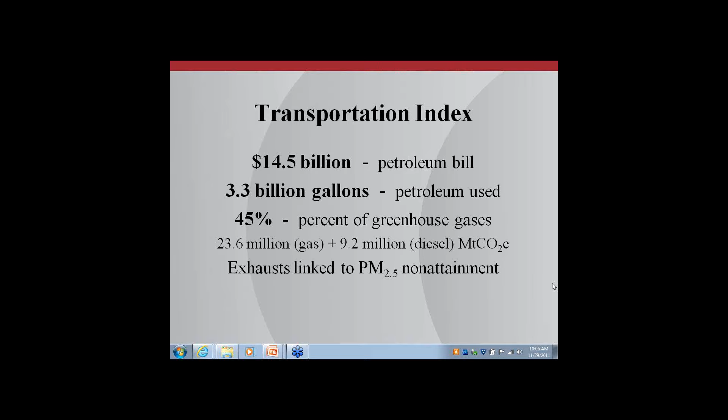Transportation is an important topic, and you can see some of the issues here. $14.5 billion spent on petroleum in Washington State. That's 3.3 billion gallons. Transportation makes up 45% of our greenhouse gases in this state. It's the single largest source of greenhouse gases. It's also linked to particulate matter pollution, and there are several areas in the state that are non-attainment areas, and that can be addressed very nicely with a transfer to natural gas or biomethane.

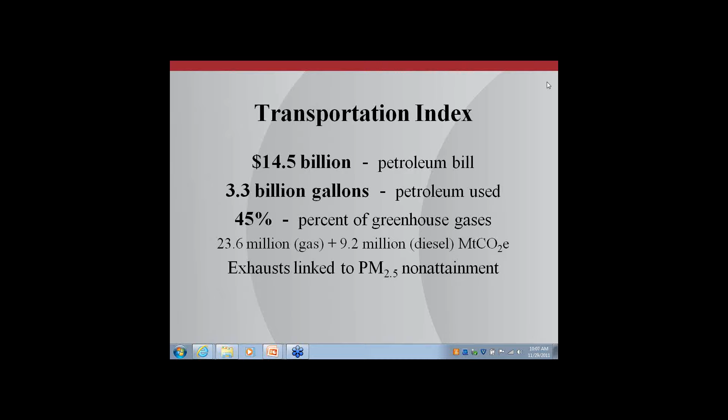We think CNG is the pathway forward for biomethane adoption. Natural gas as a fuel produces much less smog and less greenhouse gases than its petroleum cousins. Natural gas is for the most part made in the United States, so a domestic fuel, and currently is available on a diesel gallon equivalent for about $1.50 to $2, so some significant savings over diesel for heavy-duty trucks. It also qualifies for a fuel credit from the federal government, and more vehicles are coming to market. The manufacturers are developing conversion kits as well as dedicated vehicles for natural gas.

And we think that's an important in for biomethane, which in comparison to natural gas has the same reductions in smog, but even more reductions in greenhouse gases. And because biomethane can be made from local sources, we even get to keep more of the economic value here in Washington State.

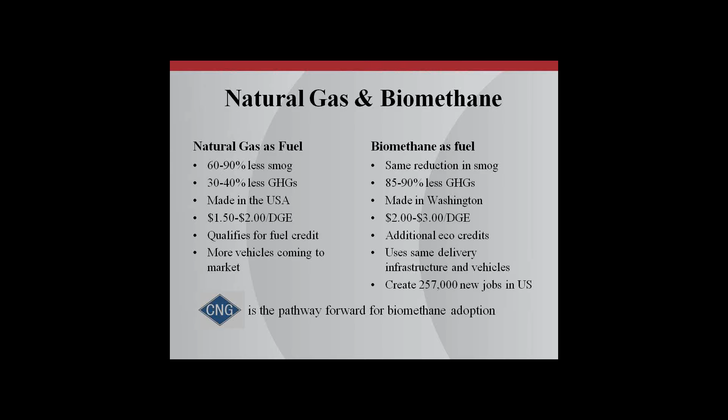It can be produced, we believe, for about $2 to $3 per gallon equivalent compared to diesel, so still a better deal than diesel, and may be eligible for additional environmental credits or renewable identification numbers through the federal RFS, the Renewable Fuel Standard. It uses the same delivery infrastructure and any of the same vehicles that natural gas uses, and overall in the United States could produce over 250,000 new jobs.

There are several potential sources of biogas for biomethane. Landfills is a sizable one, but you see already some of these larger landfills, Cedar Hills and Roosevelt, are already moving toward doing power production. But we have a great opportunity that we're going to learn about a little bit more this morning at the LRI landfill in Pierce County, where power and CNG will be part of that mix.

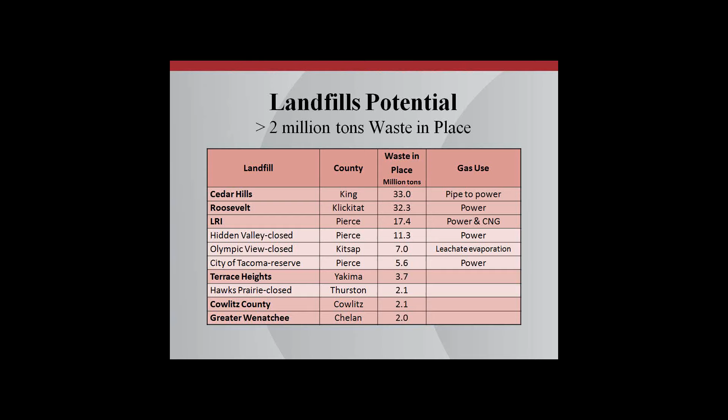Wastewater treatment plants are another important potential. And we have, again, several of the larger ones that have done projects of doing power production, or in the case of the South Treatment Plant in King County, they're putting the biomethane into the pipeline where Puget Sound Energy is using it to make power. But there are a couple of good opportunities in Tacoma at the Central Wastewater Treatment Plant, at Chambers Creek in Pierce County, and at Brightwater in Snohomish and King County, where there could be some additional emphasis on CNG.

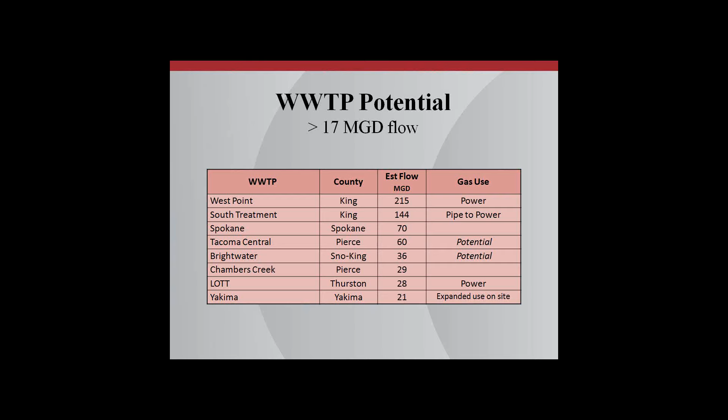It's expanding with more and more technologies and more market development. More of this organic waste is being captured in our yard waste carts, or what are becoming organics waste carts, where instead of, or in addition to composting, that material could be digested first. There are new technologies, some of them high solids digestion technologies, that could capture the energy value of those materials before it goes to compost or fertilizer manufacture.

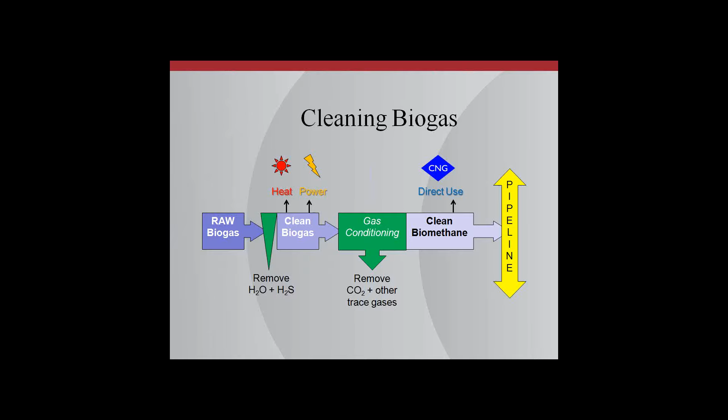Here's some of the basic information we've learned through our study, literature search of various studies on the economics of producing biomethane. You can see some of the results there. Smaller projects on the left here where the cost of producing biomethane is still pretty high relative to things like electricity, and certainly many of them higher than the cost of natural gas wholesale right now. But as you get to larger projects, you can see the cost of producing clean biomethane drops down to where for larger landfills it can compete directly with natural gas as a source.

The cost of compressing biomethane adds something to the project, but what we've learned from talking with developers is that compressed biomethane or bio-CNG can be produced for about half of what diesel is today. So maybe double natural gas, but half of diesel.

This leads us to the conclusion, something that's confirmed in these different studies, of reported thresholds for various size projects. So a dairy manure project alone would need about 8,000 cows, or the equivalent of gas of 8,000 cows if they're doing some co-digestion. Wastewater treatment plants, National Grid in the Northeast found through their economic analysis that about 17 million gallons a day treated and then digested the solids puts them in that threshold of seriously considering biomethane. And landfills, they need about 2+ million tons of waste in place, and then an increasing amount over time.

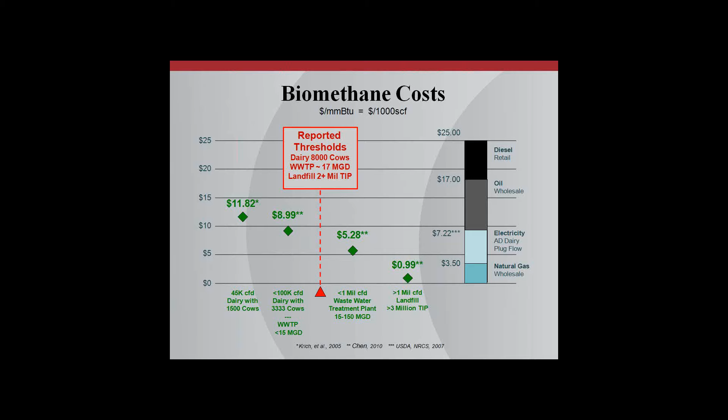In terms of power versus biomethane for fuel, here are some of the market trade-offs we've learned of. There's a lot of experience regarding power generation, and at the same time, some market variability. Some areas where digesters can get really decent prices for the electricity they're producing, others where the price availability is much lower and doesn't make for profitable projects. These projects tend to be tied to a local utility, so you need to get some buy-in from that utility. You don't have a lot of choices of where to go with electricity.

There's low efficiencies. The engines themselves are about 30 to 35% efficiency on the high end, unless you find profitable uses for the heat that comes off of the engine. There is some preference in some of the USDA grants, the REAP grants in particular, that give a preference to power generation. And in Washington State, I-937 provides a credit and a bonus for projects producing power from biogas.

In terms of biomethane, you still need to use some of it to heat the digesters, but a direct use is great. If you can make direct use of the biogas, some larger dairies in the country are using it directly to power their milk trucks. If you can get it into the pipeline, that gives you a lot of flexibility. And there's very high efficiency in terms of natural gas equipment, boilers, engines, and vehicles.

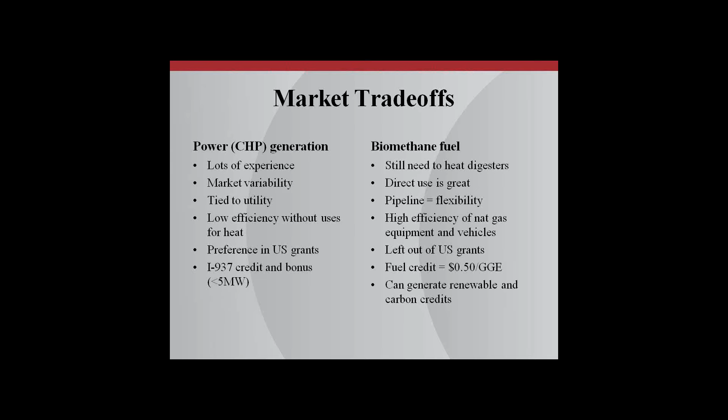Currently, they're left out of some of the U.S. grants, as I mentioned, but there is a fuel credit of 50 cents per gas gallon equivalent to natural gas and biomethane projects. And they can then produce renewable and carbon credits. So you get some of that environmental benefit. That's pretty important in terms of market development.

So overall, we see some terrific opportunities for the Clean Cities Coalition and other advocates to do some replacement of diesel and gasoline to replace some of those impacts with cleaner local biomethane.

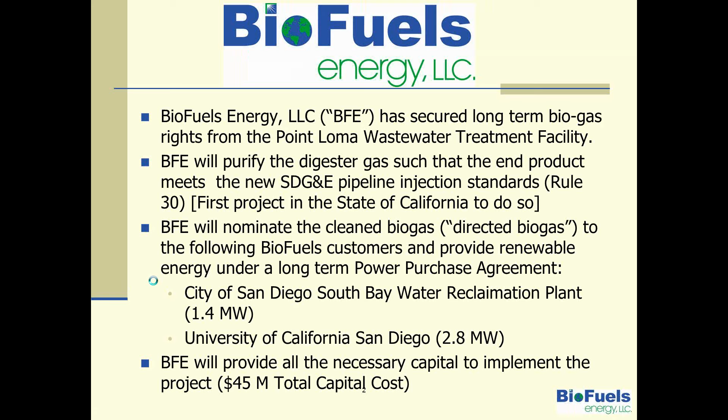The Point Loma wastewater facility is owned by the City of San Diego, and Biofuels is paying the city for approximately 1.1 million standard cubic feet of digester gas. That gas is approximately 62% methane, that would otherwise be flared. You can actually see in the upper right-hand corner the gas flares there. There's 3 gas flares. When we purify at the proposed BUDG site, we will actually bring those flares down.

The city is also presently generating about 4.5 megawatts with the other 2/3 of the gas that's being produced at this facility. But due to incremental cost of transmission upgrade and expansion, it wasn't financially feasible for them to use the balance of the gas. The city utilizes about half of the energy of the 4.5 megawatts that they generate at the site, and the other half is actually sold to SDG&E.

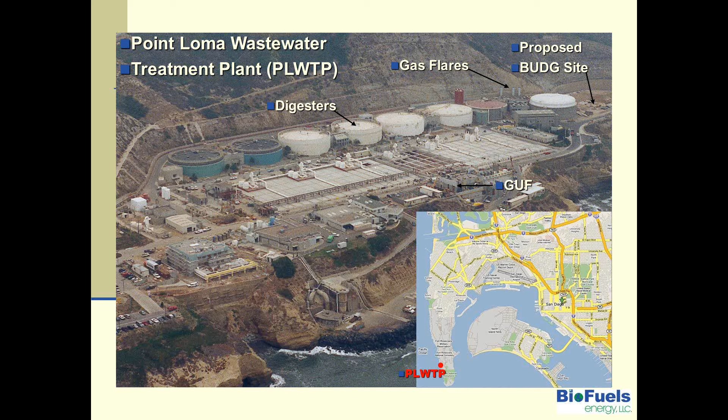Now, as you probably know, but I want to make sure it's understood by all, the biomethane molecules themselves that are being injected at Point Loma, as you can see in the map in the lower right-hand corner, it's at the very point of the peninsula, won't be supplied to the University of California, San Diego, which is 28 miles away, or the South Bay facility, which is 15 miles away. The gas molecules at Point Loma will actually be cooking eggs in the morning for the residents down in Point Loma. As I said before, that's a first in the state of California.

Turning now to Pierce County, Washington. Biofuels has executed a long-term 20-year contract with Waste Connections, who is the owner of the LRI landfill. The project will be developed in phases and will include the production of a CNG product that will meet the California standard for compressed natural gas as a CNG transportation fuel. I'll actually review that specification a little bit later.

Unlike the situation in San Diego, the renewable CNG will be delivered to customers within a 50-mile radius in tube trailers, much like propane is delivered to outlying facilities today.

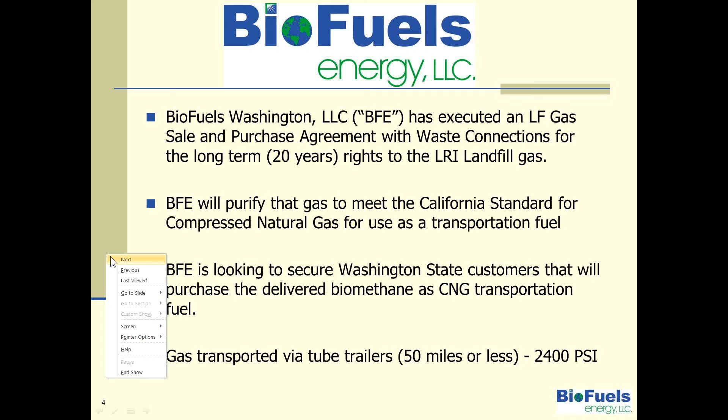The LRI project is located approximately 30 miles from Tacoma, 50 miles from Seattle, and about 5.5 miles due south of downtown Graham, Washington.

Our first option for the LRI biomethane is to sell it as a CNG transportation fuel in Washington if users in the state of Washington are interested in the product and will step up to purchase it. It's our intent to actually develop the LRI landfill project in 3 distinct phases, and thought it was worth going over the numbers in regards to that development.

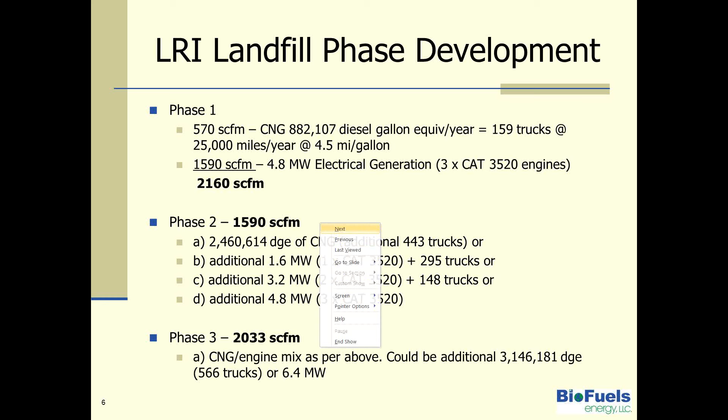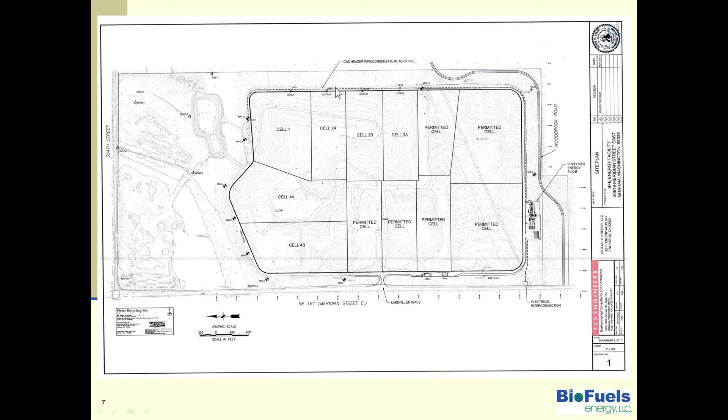This is a closer look at the site layout itself, just highlighting a few points. You'll note that there's the 3 Cat engines, 1.6 megawatt engines, and it will accommodate an additional 3 in the layout if we should go in that direction. Note the 4 CNG loading bays where tube trailers may be continuously loaded. There is available space to extend the number of bays in the future.

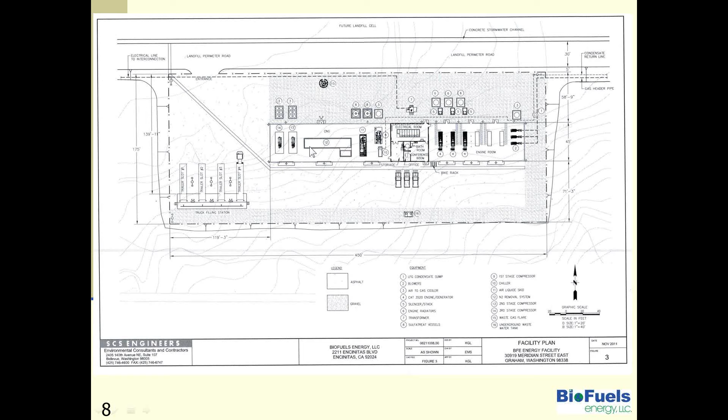The layout includes the Air Liquide skid, whose main purpose will be to extract the 35% plus of CO2 in the gas. And then that's followed by a nitrogen removal system. The air permit has been submitted for a new flare, and the existing flares at the landfill site will be brought down and displaced by that one flare. But the flares at the site will continue to stay in place in case we're down for any operation. Then the existing flares will be utilized for the gas.

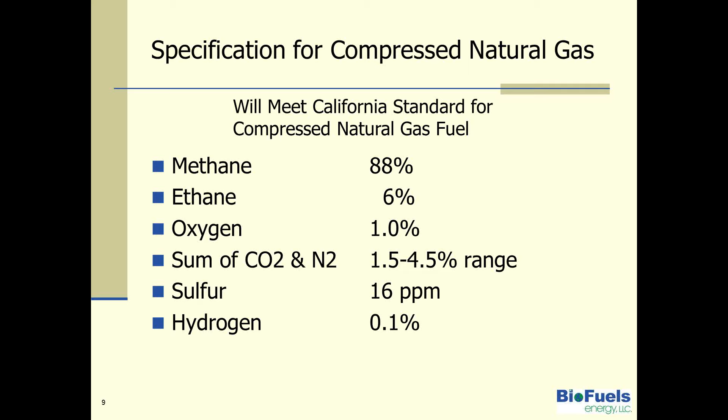I wanted to make sure that I made available the CNG gas spec, and I'd just like to highlight the methane content. 88% is significantly less than the 98% specification that's required for the injection of CNG into the pipeline in California, and to a lesser degree in Washington. I think it's 97 or 97.5 in Washington. Landfill gas presents a significantly greater challenge in terms of cleanup, however, than a wastewater treatment facility. So if a decision was ultimately made to transport the biomethane to California, the cleanup system required would be more rigorous than that necessary for CNG as a transportation fuel.

Just to share with you the highlights of the project development schedule. Both the air permit and the land use permit to Pierce County were submitted earlier this month, and we anticipate to execute a contract with Puget before the end of the year in December. And simultaneous to the permit activities, detailed engineering will progress during the first half of 2012. We anticipate that the permit process will be completed by the middle of the year. And this will result in CNG being available as a transportation fuel in the summer of 2013.

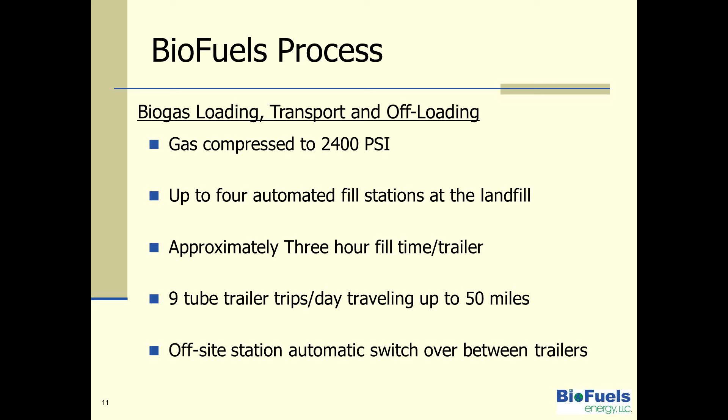The tube trailers themselves will be loaded at the landfill and compressed to 2,400 psi. Each trailer will take about 3 hours to fill in phase 1. And there will be approximately 9 CNG trips per day in and out of the landfill for the first phase. It should be noted that off-site fueling stations will also need to be installed at or near customer locations. If the phase 1 CNG portion of the project is successful, we are also considering the possibility of constructing a merchant Pierce County CNG station available to the public to further the concept of CNG as a transportation fuel.

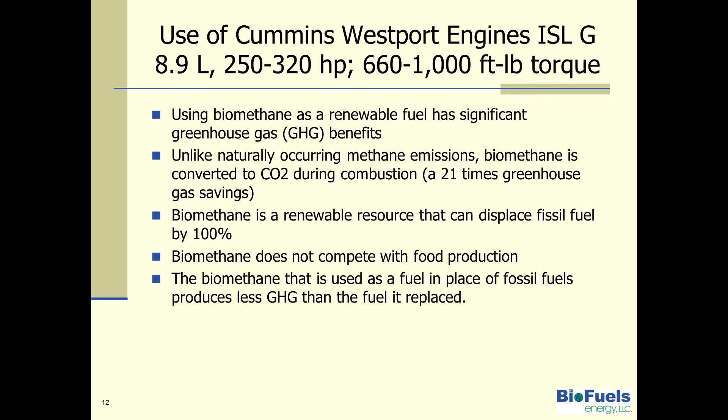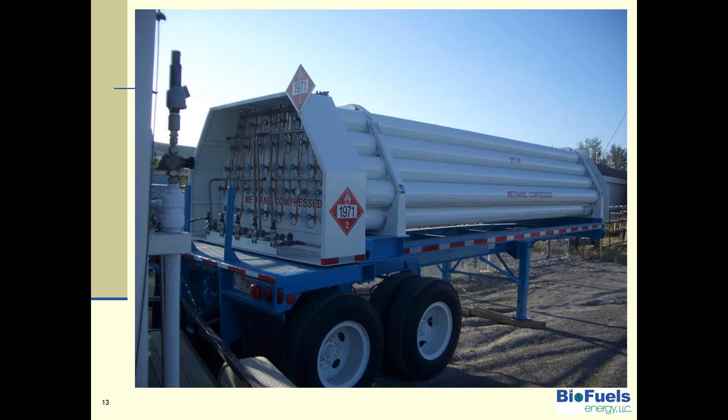The tube trailers themselves that we will utilize to transport the CNG will be fueled by CNG from the landfill. We anticipate purchasing 4 Cummins Westport ISL G 8.9 liter engines. In addition to all of the environmental reasons for the use of renewable CNG as a transportation fuel, in my mind, the most significant advantage is that the implementation of this concept, if adopted on a wider scale basis, including the broader use of natural gas, will reduce the country's reliance on gasoline imports and improve our balance of trade. If you haven't seen the tube trailers I've been referring to, I just thought a few pictures might be helpful to give you an idea what that might look like.

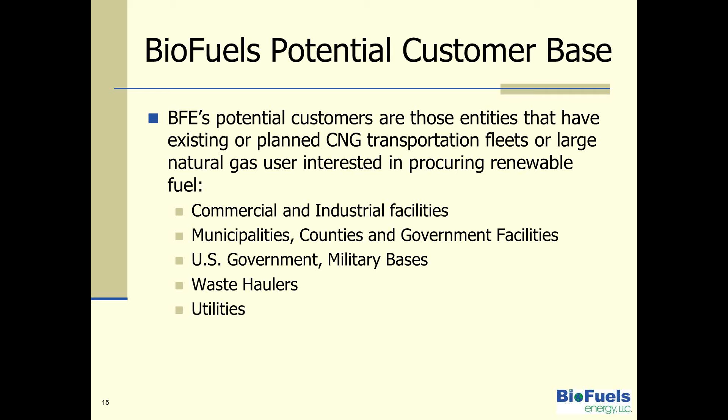The customer base for CNG that is produced will hopefully be utilized as a transportation fuel, but could also be made available to large natural gas users interested in procuring renewable fuel. Although with the present prices on natural gas, this seems unlikely. It is more likely that municipalities, counties, or government agencies are the more likely candidates. Corporate entities with large transportation fleets or waste haulers or utilities also seem to be potential candidates.

In closing, I'd like to highlight the potential yearly fuel savings for those considering the alternatives. The renewable CNG can be purchased in present-day dollars for approximately $2 a diesel gallon equivalent. That was at the lower end of the spectrum that was provided by Jim, as compared to, say, $4 a diesel gallon equivalent. The yearly fuel savings associated with the initial phase 1, 159 trucks, would be approximately $1.76 million a year in fuel savings, again, assuming 25,000 miles a year at 4.5 miles a gallon.

For a full CNG build-out, the fuel savings could be as much as $13.5 million a year. A long-term purchase will provide the added benefit of dependable, predictable, long-term fuel sales. With that, Jim, I'd like to turn it back over to the next speaker.

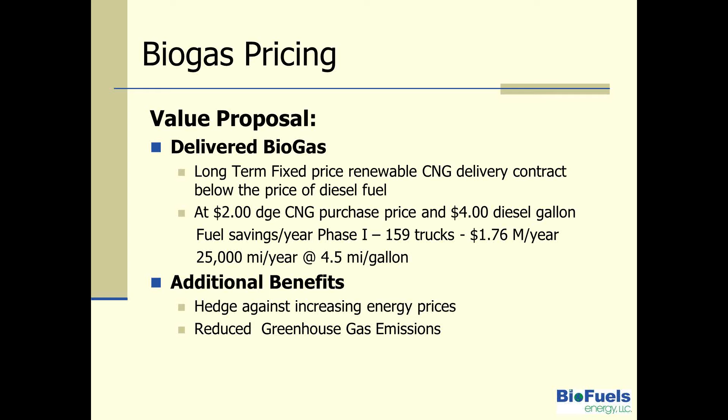Thank you very much, Frank. A couple of quick questions while we're transferring over the presentation to Scott. Someone wanted to know, are you able to use the heat from those CAT engines? Right now we have no plans to utilize that heat, unfortunately. So there'd be a significant heat resource there if industry was able to use it.

And in terms of the gas cleanup technology, you're using an Air Liquide system. Can you describe that just briefly? It has a PSA in the system, and again, I emphasize that the main focus of that Air Liquide system, there's many applications of that, including we're using the Air Liquide system down at the Point Loma facility. I would encourage you to go online and Google Air Liquide, is to remove the CO2 from the gas.

I might add, I'm going to take the opportunity to just inject. You can see on this last slide I included John Rogers' name with Waste Connections. He's the district manager for the LRI landfill. So there were certain subjects as it related to the landfill and the public relations associated with the landfill. I would direct any of our listeners to contact John in that regard if there should be any questions. Okay, now we're going to switch over to our third speaker and take additional questions at the end.

Our third speaker here is Scott DeWeese. Scott's a grant administrator for the Western Washington Clean Cities. He joined the coalition last year to help manage the multiple grant projects occurring at the coalition right now, as well as to lend expertise with the Western Washington University Biomethane project at the Vanderhaak Dairy in Whatcom County. Previous to joining the coalition, Scott was a business analyst in the commercial solar industry and cut his teeth on developing ownership structures for third-party financed solar projects.

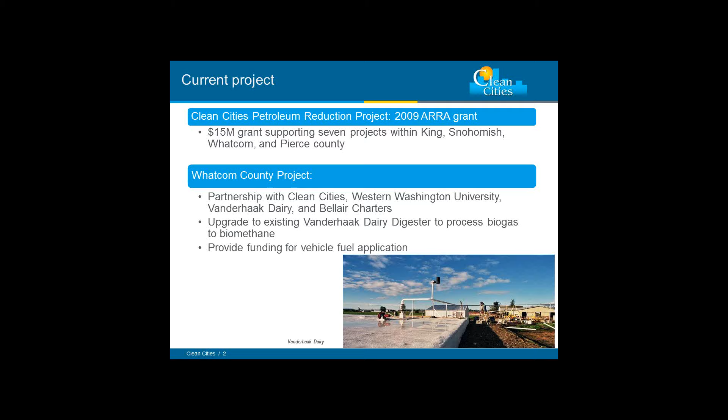The goals of our project were basically to demonstrate that dairy farm scale biogas projects are feasible and financially attractive. In addition to that, we also wanted to illustrate the energy resource available in Whatcom County.

We have a really unique situation in that Whatcom County has a very large agricultural and dairy industry and is also the host to the Vehicle Research Institute at Western Washington University. So you have a world-class group of engineers looking at vehicle technologies of all sorts, and you also have a very strong influence in the community and an appreciation for agriculture. So there's a real opportunity there that the Vehicle Research Institute identified, and we were fortunate enough to participate in.

And just to give you guys a sense of scale, there are 41,000 cows in farms 200 head or larger in Whatcom County. And based on a fairly conservative estimate of the amount of methane available in farms 200 cows or larger, we estimate that that would produce enough fuel to be equivalent to 3.9 million gasoline gallons per year. So there's a huge opportunity for this local community to produce its own fuel and pioneer some of the technology and business models necessary to realize this untapped energy resource.

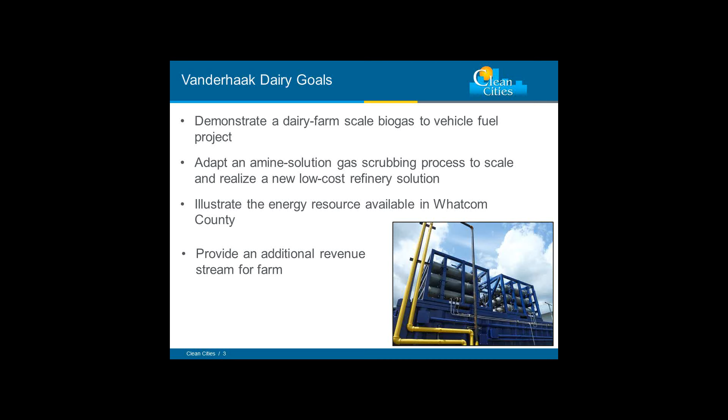And there's the stars of the show right there. You can see them up front. They're very photogenic heifers we've got at the Vanderhaak Dairy. And in the background, you can see this container here houses the compressing equipment for the fueling station. And these contact towers here are where the gas is cleaned and refined of its contaminants. And then on top of the container, you can see our storage vessels, and there's a two-line dispenser back there.

As you can see, the facility is mostly built right now. Our CNG station is operating. The vehicle for the Bellair Charters has been converted. I'll talk a bit more about that. And the biogas refinery, the cleaning process, has essentially been constructed and is undergoing testing and some small process revisions right now.

Like any project of its first, there were a lot of challenges and changes that occurred along this process. Starting with the vehicles, we had a tourism company that operates a fleet of coaches, MCI coaches, and those vehicles use a Cummins ISL engine. And so we believed that they were going to be fairly good candidates for being retrofitted with an ISLG engine to use the natural gas. There were challenges associated with retrofitting those vehicles that we didn't foresee, and unfortunately we were not able to convert the vehicles we had planned on converting to run on natural gas.

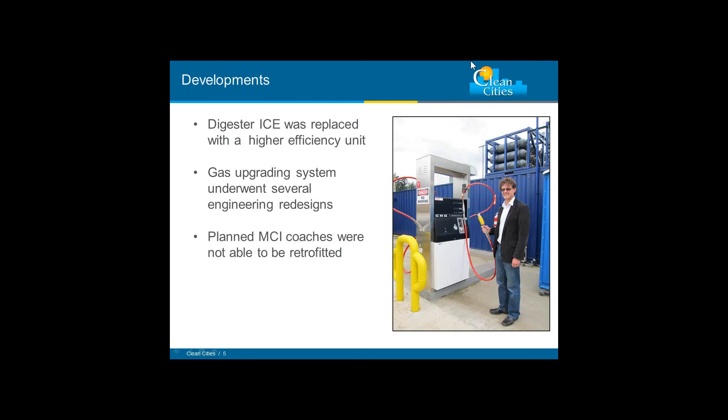In that previous slide, I showed the two contactor towers. The original design called for those two towers to be operating in parallel, but in order to meet the gas quality requirements we had set out to meet, the system had to be run in series instead. And it would have been a better design to have a single tower rather than two towers in series. But again, those are the things you learn.

Setting out in this project, we believed that we would be able to provide fuel at $2.50 per gasoline gallon equivalent delivered to the off-taker. And there were challenges associated with that, and one of which, and I'm jumping ahead here, but partner expectations is a real paramount concern for this project.

And what we discovered was we have a farm here that has an established contract with a power utility and had a very favorable price for electricity that they were receiving. Now, as Frank showed in his PowerPoint, you really don't need to divert a large portion of the gas you can produce at one of these facilities necessarily to meet the amount of fuel that you're trying to make. And that's the case with this dairy as well.

We were looking to use only a very small portion of the gas that was being produced by the facility as vehicle fuel, and the remainder would still be used to generate electricity. But it was difficult to quantify the amount of gas that we were going to need. And between the seasonal variation in the gas production and the farm upgrading their engine and therefore being able to use more gas, we were in a scenario where we needed to compensate the farm for at least the amount that they would earn in burning that biomethane as an electricity product.

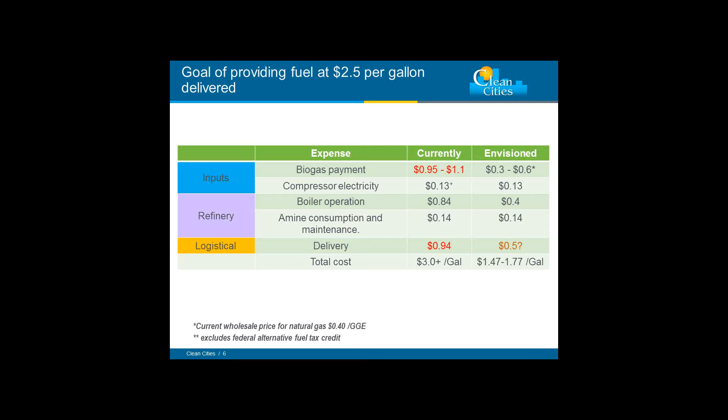And these prices do exclude the 50 cents per gallon or net 40 cents per gallon federal tax credit that the university will be able to take, although that is slated to end at the end of this year. So there's a bit of uncertainty associated with leaning on that tax credit for the economics of this project.

So, what we learned really is that really clear communication between the different partners is paramount for a project like this. If we had a bit more notice and foresight about the initiatives that the farm had in terms of their power generation, I think that might have altered our strategy a bit.

And I think that also really supports the point that projects of this complexity require a dedicated project manager. In this case, the university was the project manager, and of course their core business is educating students. So there was a challenge associated with basically just the amount of legwork needed to keep all these moving pieces at the same speed. And I think we probably would have been able to set better expectations among the off-takers and the providers of the gas had we had an intermediary in there acting as a dedicated project manager.

Another thing that is sort of an important consideration that kind of hit us in the face, it was funny actually, is that as a contingency for this project, we set up fossil fuel-based natural gas to our fueling station in order to meet some timing deadlines. But really, in Whatcom County, there is no natural gas pump right now.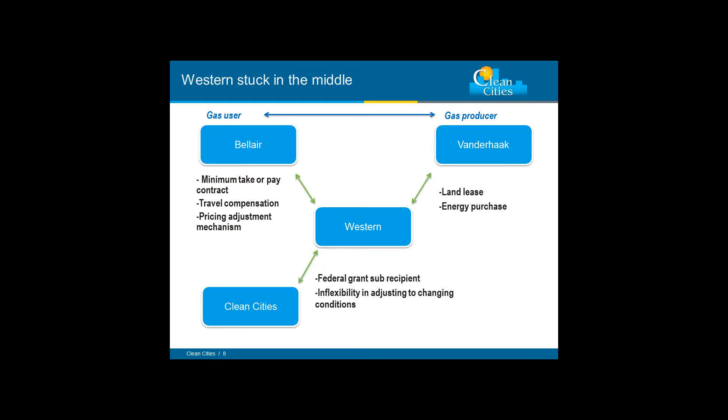If the gas user is the farm, they have a vested interest in making sure that the system that's producing the gas is operating properly and that the supply of gas will always be there. So I submit that that's a really important consideration. If there could have been a contractual arrangement between the dairy and the off-taker directly, that also probably would have gone a long ways to alleviate some of the complications in the contract arrangement here. So that's basically all I have to say about the Vanderhaak project.

As I said, right now the system is operating on pipeline natural gas. The university has tested the biomethane facility and is just working through some sort of process revisions to make that system work. And they're still working on the regeneration process for the solution that cleans the gas. So we're not quite there yet, but we have a lot of the bricks in place and the mortar's starting to set up.

And so just quickly wanted to identify some of the other areas our coalition has been working on biomethane. As Jim said, we're a sponsor of WSU's Biomethane for Transportation Opportunities. That's a publication that WSU is putting out that identifies sources throughout Washington and how they might be used and utilized and what are some of the challenges associated with that. And we've also provided consultation for project developers and wastewater treatment plants in evaluating biomethane as a vehicle fuel.

And we also are working to identify and assist end users of biomethane because, as both of the Jims and Mary Ann pointed out, this is an extremely low carbon fuel that is clean burning and provides significant domestic economic benefits. So we're really excited to see this market grow, and we're working towards that.

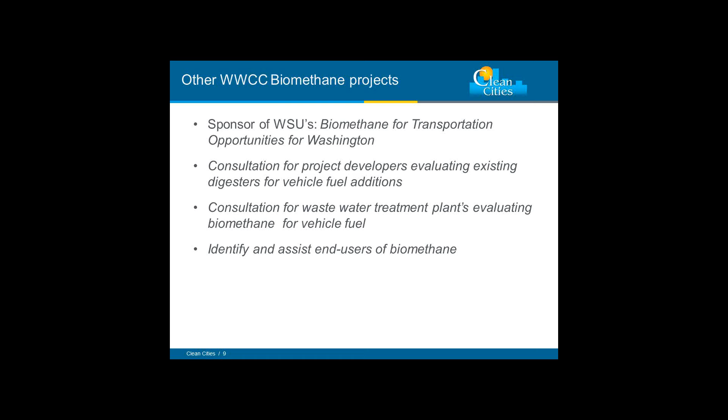And so with that, I'm going to launch into my pitch for Clean Cities, which is just that Western Washington Clean Cities is not alone in their interest and support for biomethane to vehicle fuel projects. There are 90 coalitions nationwide, and they serve 78% of our population geographically. So for those non-Washingtonians on the phone with us today, make sure to connect with your local Clean Cities Coalition if you're interested in exploring any parts of the value chain of biomethane, because we'd certainly love to know about your project and assist you if we're at all able to.

And we don't really actually offer free hats, but we do offer a lot of workshops to try and communicate to end users and vendors about the opportunity, not just for biomethane, but for all alternative fuels, as well as behavioral changes and vehicle technologies that will help our nation reduce its dependence on oil.

So I've said it before, but like I said, if you're interested in using biomethane, producing it, or you have a technology that assists in either of those areas, reach out to us in Western Washington or your local Clean Cities Coalition.

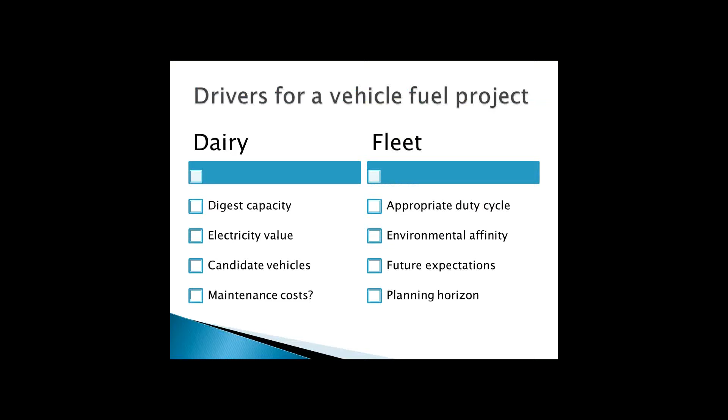And it looks like I'm getting pretty close to the end of my time here. I'm going to jump forward.

One of the things that I'll point out is that I think for these projects on a dairy to grow organically, you're always going to have a power component. I think Frank alluded to that in his presentation. The amount of gas that comes off of these systems is dramatic, even at a dairy scale. And, of course, the challenge with producing vehicle fuel at a dairy is that that's not usually a center where you're going to have a lot of users.

So in almost all scenarios, you're going to be able to produce a lot more vehicle fuel than you're going to find customers to use. And you have the opportunity maybe to put it in a pipeline or use tube trailers to take it off site. But of course, there's pretty significant costs with either of those options.

And so I would suggest to you that you're always going to have a power generation component, because you need the heat from that power generator to heat your digester. You need the stability of having a customer to purchase power from you for 10 years in order to line up the capital necessary to build a digester.

And interestingly, and this is an area I'm not well educated on, but I'm certainly interested in learning more, in the traditional dairy digester model, you're putting a pretty dirty fuel into these generators. And if you have the opportunity to sell a higher margin fuel as vehicle fuel and invest in the equipment necessary to clean that fuel, there may be a pretty attractive opportunity to clean all of your gas and then run a clean gas through your power generation system, and save on maintenance.

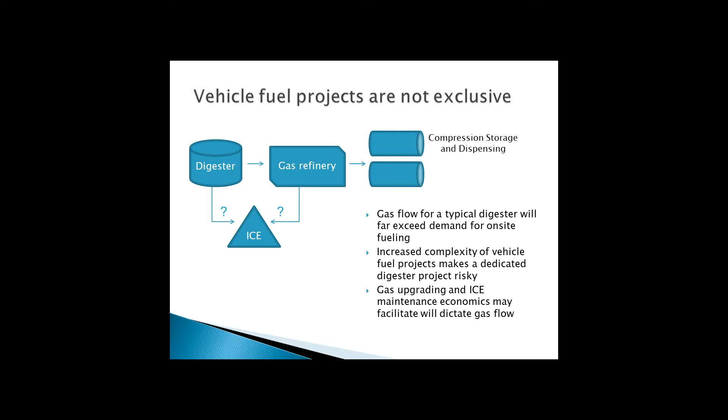And so with that, I've alluded to this, but really what's the interest here is there's significant margin in producing a vehicle fuel substitute rather than power. Our digester in Whatcom County is very fortunate and receives a really favorable electricity rate for the power it produces, and that makes the commodity value equal to about $1.15 a gallon.

Well, we know that if we can sell that fuel for somewhere under $3 a gallon, well, I guess somewhere under $2.50 a gallon, we're going to be able to bring customers to the market. So there's an opportunity here to produce a fuel that has maybe a higher benefit to the community and to that farmer itself.

And of course, we've all noted that natural gas is through the floor right now, so it's really difficult for a biomethane or a renewable natural gas project to compete head-on with fossil fuel natural gas. But the hope is that the proper incentives will be created so that there's at least a level playing field for generating electricity or generating a vehicle fuel from biogas, and that might help to shrink the gap between the costs associated with producing biomethane for vehicle fuel.

And so with that, Jim, I think I'm going to cut myself off here so that we can take any questions.

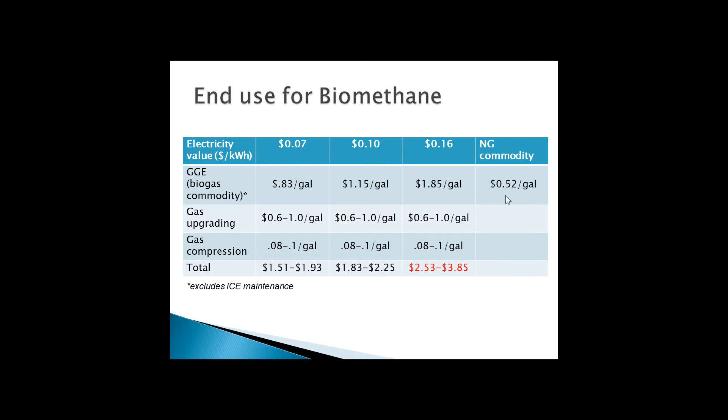What I had hoped we would accomplish, and I think we've done that well, is to demonstrate to our audience that Washington State has many local sources. In particular, the LRI is one that's developing quickly here on a fairly large scale that end users can tap into. We've got some fairly significant end users in between the refuse fleets, public transportation, school buses,

the taxi fleets, and interestingly, there's been talk lately of the Washington State ferries maybe using liquefied natural gas in some of their larger ferries down the road, and that would be a great opportunity to include some biomethane in that. And to kind of show what's involved in developing these projects, what are some of the market trade-offs, some of the costs and benefits, I think that's been really good.